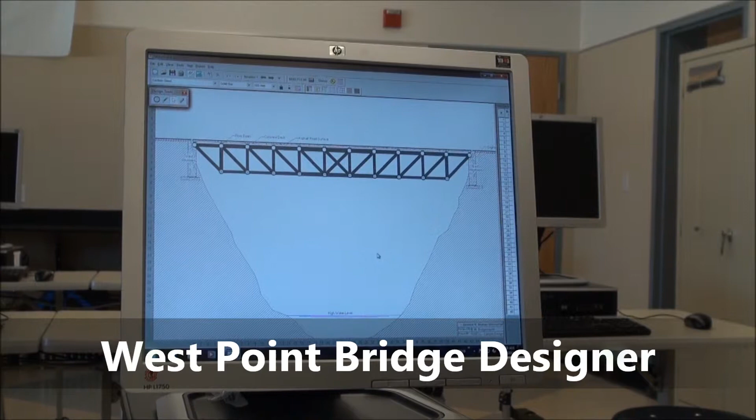All right, this is a program called West Point Bridge Designer. It was designed and developed by an engineering instructor at West Point in New York. It's a simplified version that allows the students to make changes to a bridge, either one that's pre-made or one that they come up with themselves.

They can build any kind of structure here, and it actually gives them the ability to run a simulation to see if the bridge will withstand the requirements of this truck going over the top of it. And as you see in this case, it does.

But it's pretty simple to fix as well, or not fix if you will. So we'll go back, and what we can do is edit some things. Perhaps we can just take out a couple of struts and then go back and run it again and see - it's now unstable. It will no longer even run.

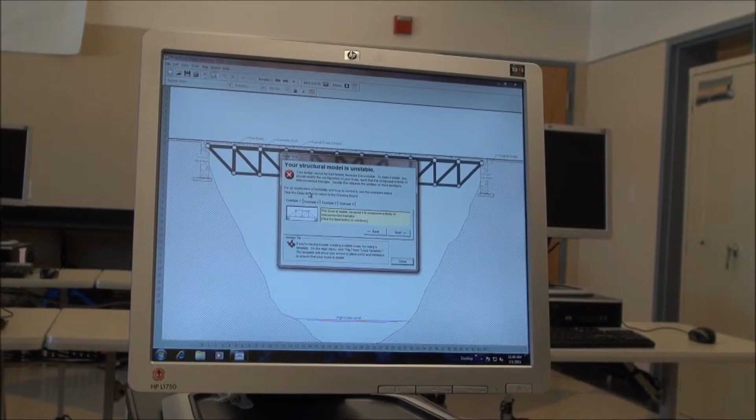So we have to go back and reinsert those items. There we go, there and there. So I'll change them a little bit and see, okay, does that actually work now? And it does.

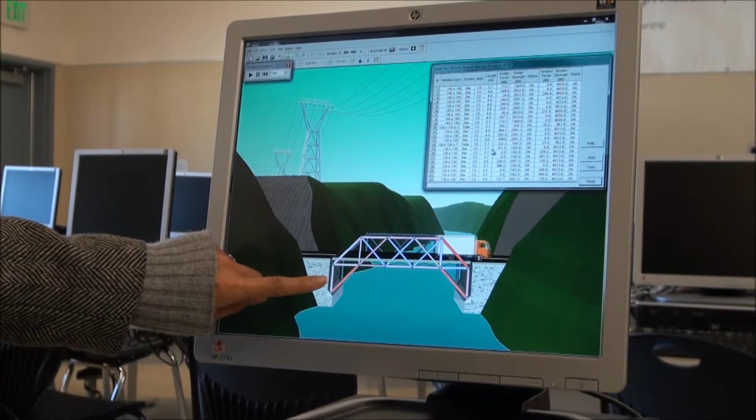The bridges will show the students how much tension and compression is on each of the members so that they can adjust the beams to different types of materials or change them from a solid to a hollow tube.

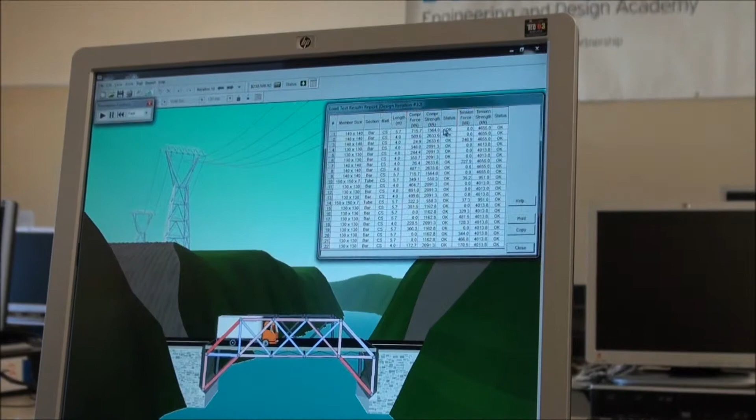In addition to the load test that they're doing here, they can also pull up a report, and it will go through each of the different members and tell them information about the member size, the section, the material, in addition to telling them how much forces of compression or tension are placed on each of the beams.

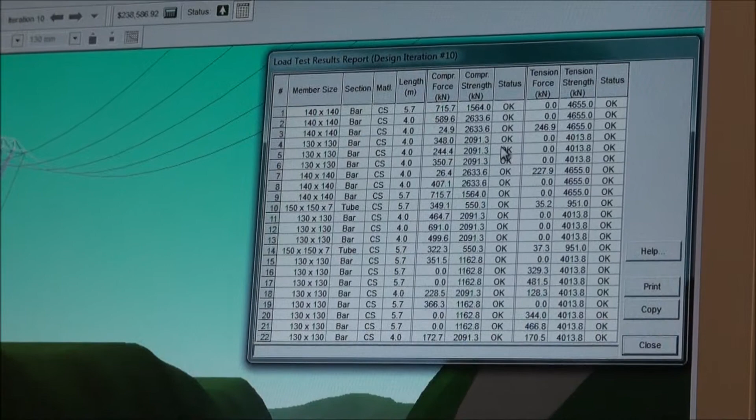This could be used if they see one of the members failing, like on some of the bridges when they drive over - let's say it fails - they might see one of these turn a really dark red or really dark blue and then break. Then they would know that member, these members in this region, would need to be changed to a stronger material, or they need to change the truss design at that location.

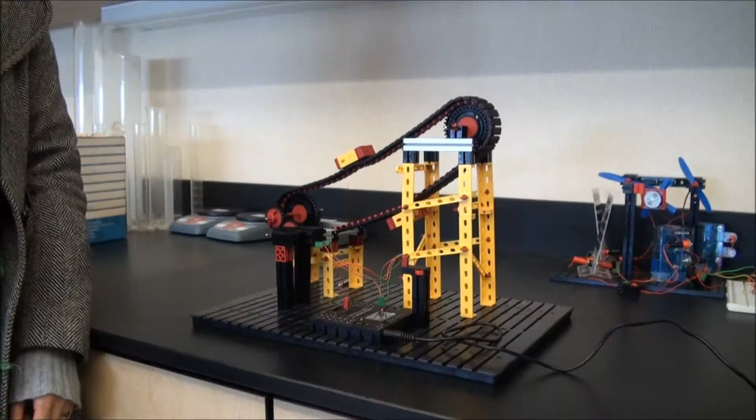So this is a sample of one of the projects that the students would be working on, constructed from the fischertechnik kits. They make sort of these mini models of manufacturing systems. This is just one example of how they could create a conveyor belt system, and they would automate it using these switches and wires so that power can go through and simulate a machine bringing something up and maybe dumping it somewhere.

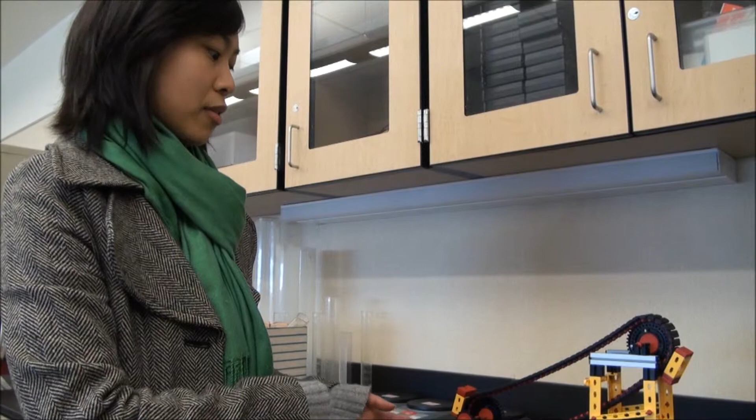Later on, they'll also be controlling the system through programs, through RoboPro. They will program it to possibly run on a timer and have it go in one direction for a certain amount of time and then switch to another direction, in addition to possibly adding sensors so it would know when one of the carts has gone to one point and back.

We have actually taken the kits that were provided by fischertechnik, and we have sorted out the most common pieces and put them into these boxes that we purchased. Makes it easier for us to transport things around, to be able to move them. The kids can keep things organized, keep them together, etc. So it's just a little tool for us to be able to manage our resources.

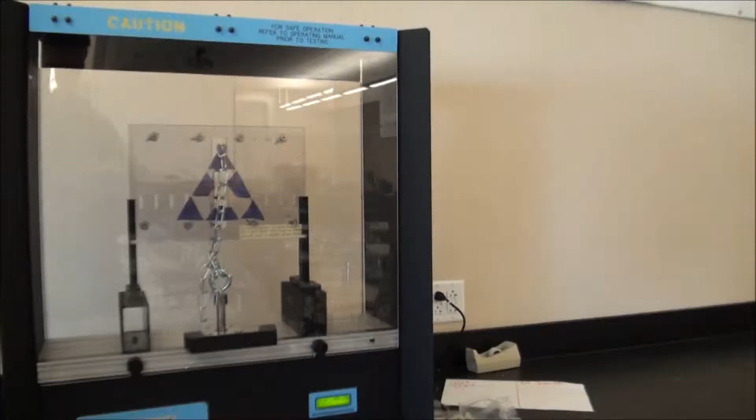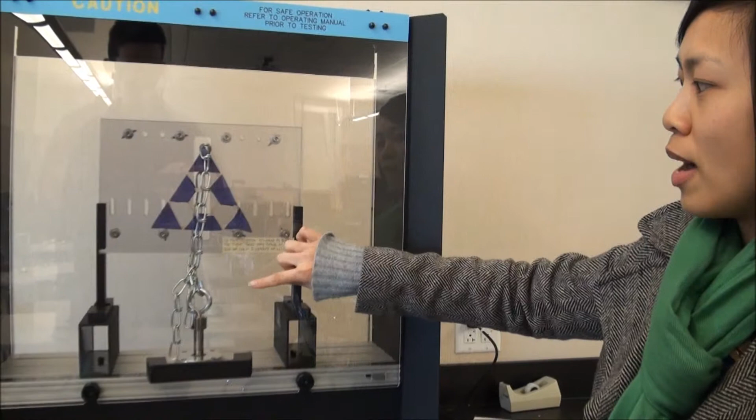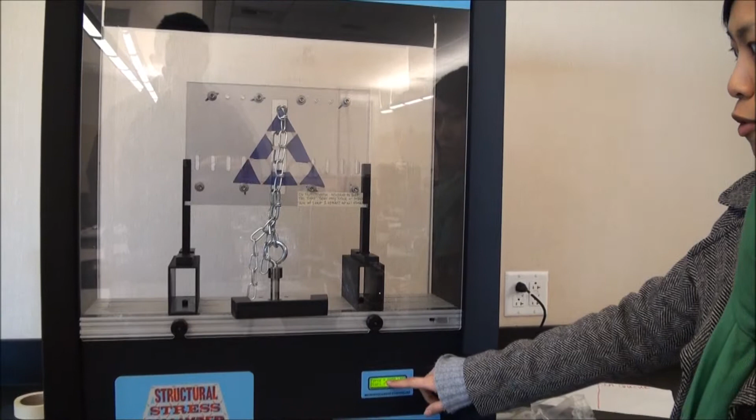So this is the structural stress analyzer that students use to test their trusses. They create a truss design and then put it inside the machine. They wrap a chain around one of the joints of their truss, and what this machine is doing now is essentially pulling this down, and it will display the amount of force being used on the chain.

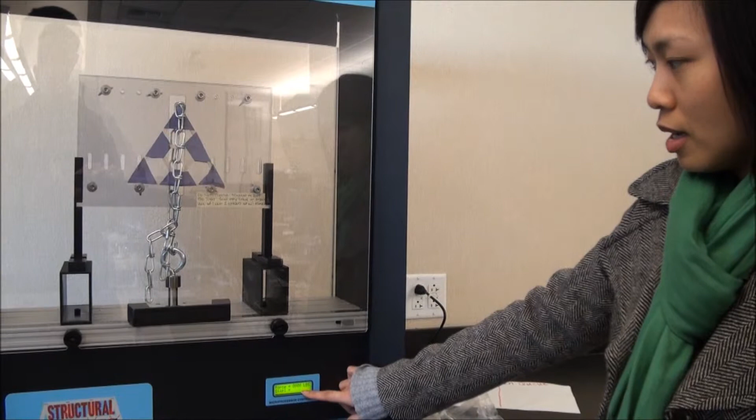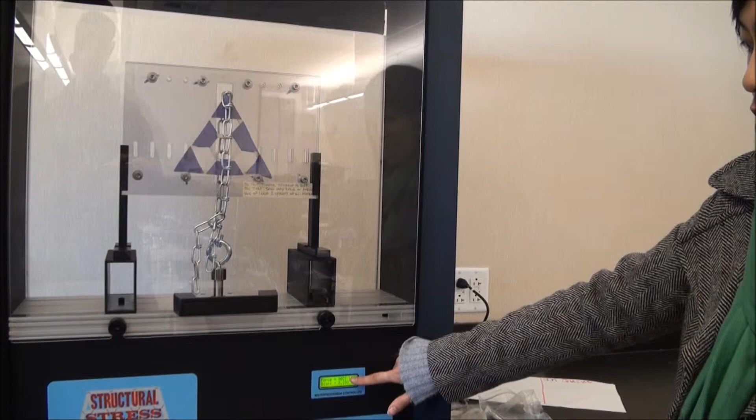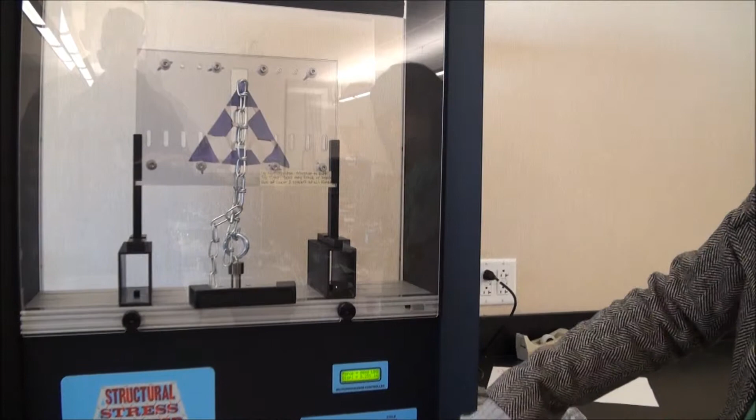As you see the chain tighten up on the truss, the force will begin to rise, and it will continue going until the truss breaks or it reaches the bottoming out point. They recognize this as reaching a maximum point. Right now you see it's going up to 20, 29, 30. At some point it will reach the highest level, and as it breaks it will drop off suddenly. That's how they indicate the maximum force the truss will take.

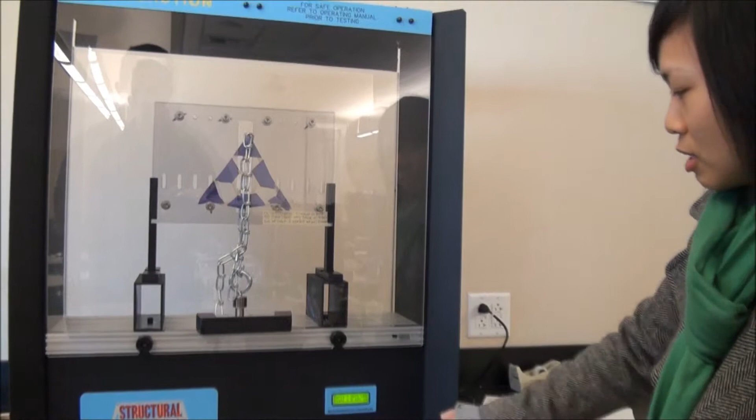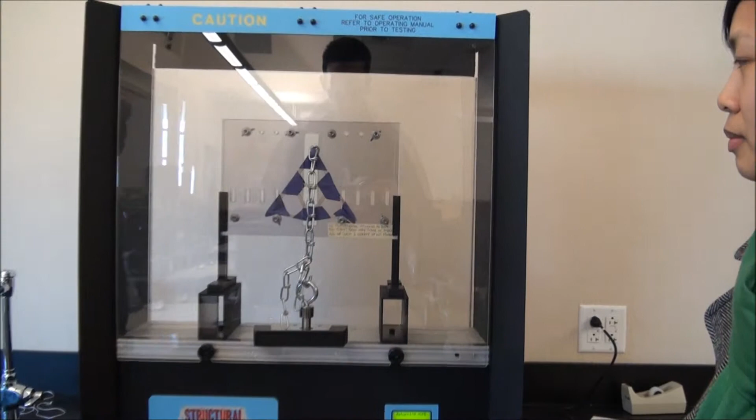You can hear it breaking now. So you heard it break, and it got to about 47 pounds, and now it's dropping down into the 30s, probably going down to the 20s soon. At this point, they can stop the machine and record the value the truss broke at and do their calculations based on that. It also gives a displacement as well, so how much it displaced before it started to break is good to know too.